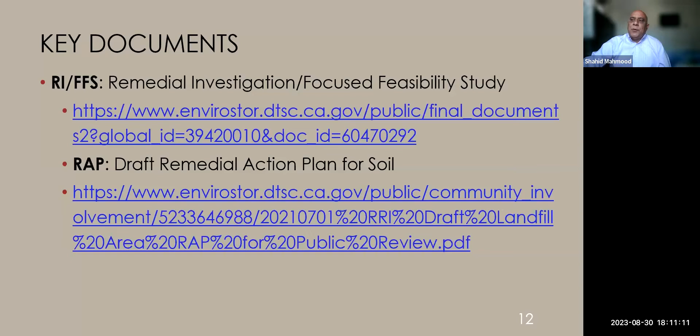The RAP presents the proposed cleanup approach for your review and comment. The link for the RAP leads directly to the document and is also being copied into the chat. The purpose of this RAP is to select a remedy, and that is the purpose of this evening's meeting.

Meeting purpose: the purpose of this meeting is to provide you with information regarding the Site 47 cleanup project, receive your comments on the draft remedial action plan for soil, and answer your questions.

The RI/FFS and RAP are available at three repositories that will be provided toward the end of the presentation. Those repository locations are at the Cesar Chavez Library in Stockton, the Port of Stockton at 2201 West Washington Street, Stockton, and the DTSC Sacramento office at 8800 Cal Center Drive in Sacramento.

Please note that you can also provide comments after the meeting through Tuesday, September 12th. After the review period ends on September 12th, DTSC and the Water Board will prepare a response to all comments and revise the RAP as needed. And next is to answer questions.

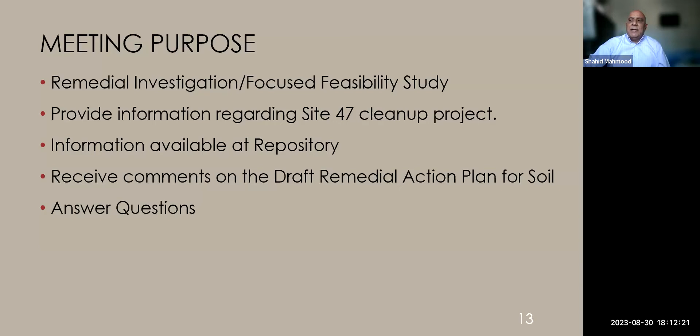So let's talk about Rough and Ready Island, where it's located. Next slide, please.

Rough and Ready Island is on the western edge of the city of Stockton, with the San Joaquin River to the north and Burns Cutoff to the south. Stockton is about 60 miles east of San Francisco. Rough and Ready Island is about 1,459 acres.

A short history of Rough and Ready Island is presented in the next slide. Next slide, please. The map on the left is Rough and Ready Island in 1913, and the map on the right is from the Navy era.

The island was marshland when settlers arrived, and levees were installed so that it could grow crops. In the early 1930s, the San Joaquin River was straightened and deepened to allow ships to reach Stockton, and the island began its use as a port.

The military used Rough and Ready Island between 1944 and 1996. The Port of Stockton used Rough and Ready Island as a port since receiving the property from the Navy. Our military use left contamination on the island, which we will discuss in the next slide.

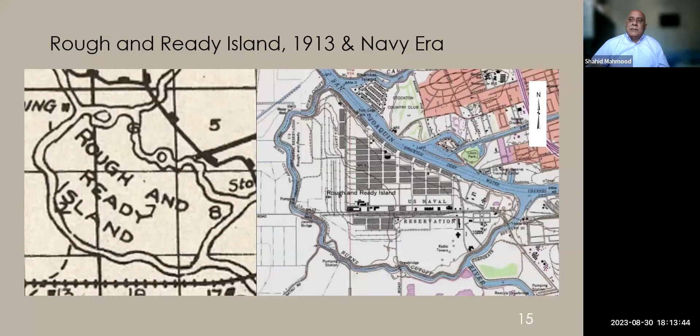Next slide, please. From 1944 to about 1979, the Department of Defense released hazardous substances to Rough and Ready Island. Investigations began in 1984 and found contamination in soil and groundwater.

This map provides the approximate location of contaminated areas. The group indicates a priority based on level of contamination and accessibility. Group A is the highest priority. Site 47 is located at the south end of the figure.

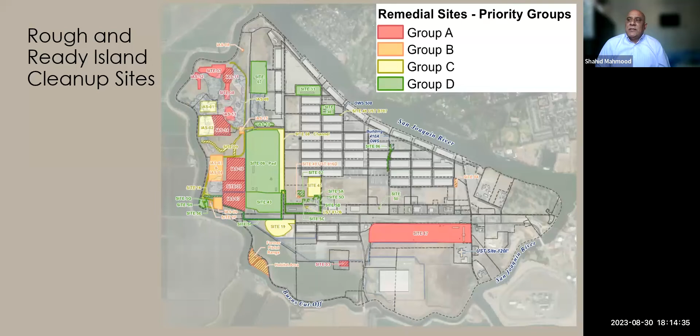Because of the contamination, it was necessary to restrict uses in some areas when the property transferred to the port, as discussed in the next slide. Next slide, please.

DTSC, the Water Board, and the port signed a consent agreement back in 2003, whereby the port would complete the cleanup of contaminated parcels with DTSC and Water Board oversight. In the meantime, contaminated parcels were transferred with restrictions on their use to protect public health, and a land use covenant was recorded on these parcels to restrict uses.

For example, the port cannot build homes on the restricted areas, move contaminated soils without DTSC and Water Board approval, or use the groundwater. Provided an area is cleaned up, the port can use the property.

We will now discuss the redevelopment proposal on the next slide. Next slide, please.

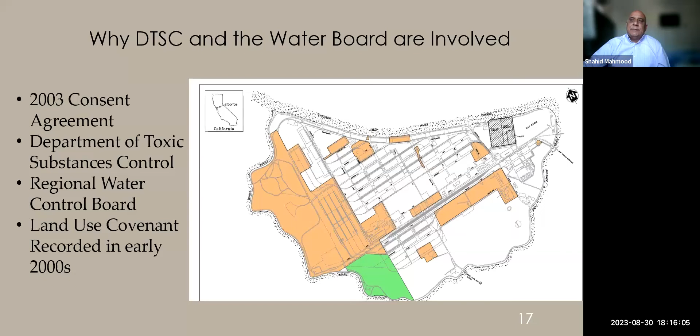The figure shows the Site 47 project area and overview. Site 47 is bounded by McCloy Avenue on the north, Hooper Street on the east, and a drainage channel to the south. The western boundary is partially curving and positioned between a curved section of the Port of Stockton expressways and Decatur. The southern side is a drainage channel connecting to the island-wide drainage network and pump station.

Site 47 contains a former model airplane landing strip, a skeet and trap shooting range, abandoned buildings and sport courts, and a section of railroad tracks.

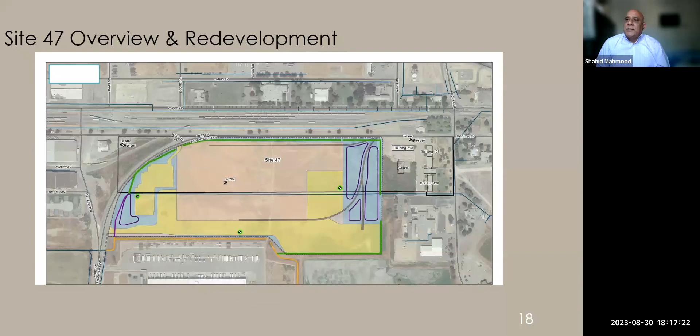The Port of Stockton has a client who wants to develop a warehouse and distribution facility project in the Site 47 area. While remediation is required regardless of property use, the remedy is being adjusted to accommodate the warehouse and distribution facility project. Next slide, please.

This is the figure for total arsenic on Site 47. North is facing up. Green means it's not contaminated - the concentrations are below levels discussed in the next slide. A blue dot means it's contaminated, and the darker the blue, the more contaminated. The other figures are similar to this one.

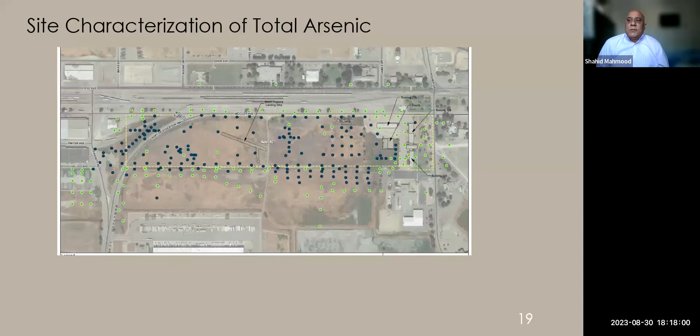Now let's talk about the cleanup alternatives considered for this project on the next slide. Next slide, please.

The port completed the Site 47 RI and FFS in March of 2022, summarizing sampling data and other information collected between 1995 and 2020. The major contaminant of concern for the site is the metal arsenic, the main driver for the site cleanup. Other chemicals of concern included polyaromatic hydrocarbons (PAHs) and organochlorine pesticides like DDT (dichlorodiphenyltrichloroethane), and a human health and ecological risk assessment were performed regarding the site.

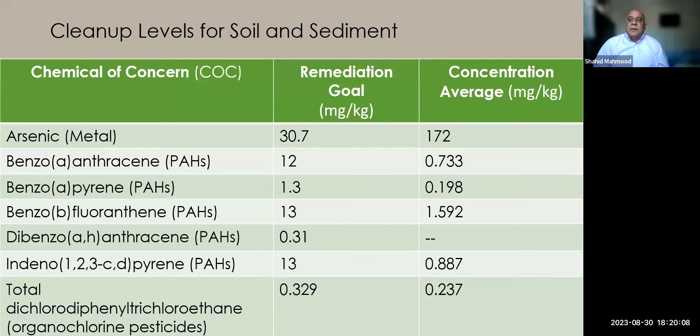Next slide, please. The RAP considered and evaluated five alternatives to mitigate the risk. Alternative number one includes no further action - just no action. The existing land use covenant would remain in place, and there would be no remediation. The no action alternative is always evaluated in comparison to current conditions, and it was deemed not protective.

Alternative number 2 includes fencing and signs installed surrounding Site 47. The fence will restrict access to Site 47 for the general public and some ecological receptors like large mammals, reducing the potential for direct contact with contaminated soils. Warning signs would also be mounted directly on the fencing to deter the general public from Site 47. In addition, existing covers would be retained near the eastern boundary and within the paved warehouse area west of the site. The existing covers and fencing would be inspected and maintained regularly, with future land use and activities in the area requiring institutional controls.

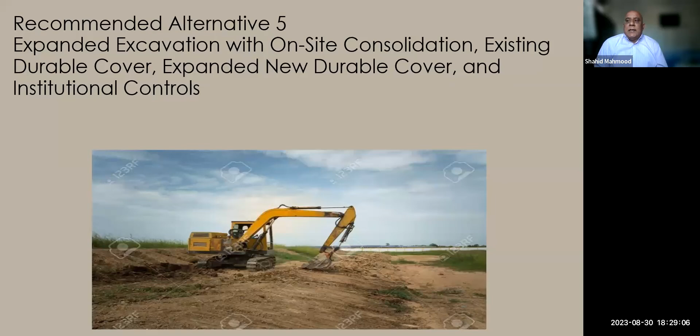Thank you. So, California Environmental Quality Act, CEQA compliance. So he discussed the redevelopment of the site, the warehouse and distribution facility. Just want to let you know that the Port of Stockton completed an environmental impact report to comply with CEQA. They held a comment period and a public meeting in January through February of 2022. They received comments, are addressing those comments, preparing a response, and preparing a revised environmental impact report. The EIR combined both projects, the remediation project that Shahid just discussed, and the development of the warehouse and distribution facility.

More information is available at that website down below, www.portofstockton.com/CEQA.documents. Next slide, please.